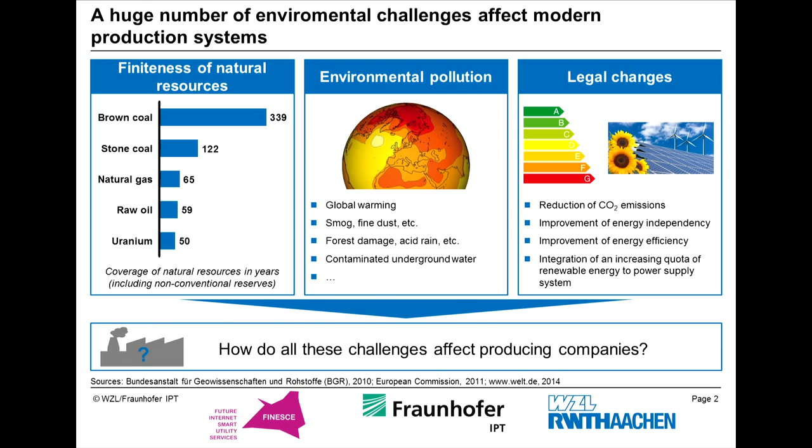But the basic motivation for that is always costs. So if you want to motivate companies to think about and consider a certain new topic, it's always about trying to internalize external costs, costs regarding the environment. This is basically the key aspect and motivation that we are looking at in our institute.

Talking about costs and some specific figures, you can see that today, in today's industry, the costs for energy are already a big factor. On the left side of the slide, I collected a few figures regarding the German industry in 2010. I took some figures from companies that have a high energy consumption.

Only in Germany, for these four sectors - chemical processing, paper industry, metal production, and the production of non-metallic mineral products - they already sum up to an amount of 5.8 billion euros for electricity.

Looking at a few more statistics, you see that prices for energy, and especially electricity rates on the right side, increased over the last decade, and the trend is still expected to rise further. This is a big factor that comes into the thinking of companies - the motivation via costs, so the reduction of costs.

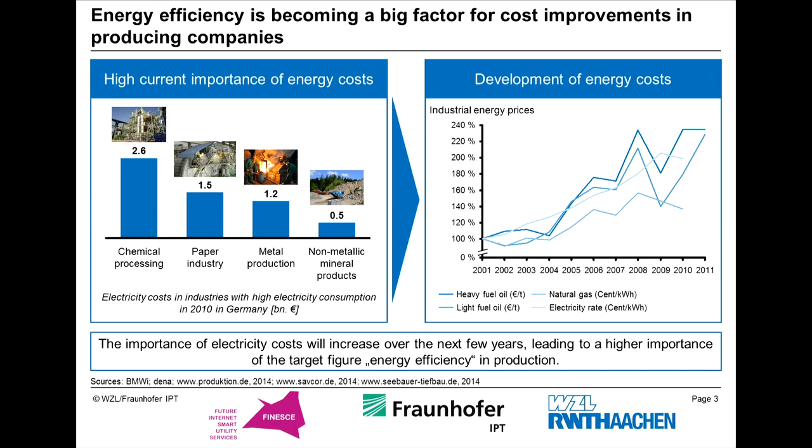Then looking at today's price models for companies - what are the basic electricity rates that companies have to cope with today? I collected an example of tariff rates used in Aachen from our local energy provider. But I think this applies to basically most companies, at least in Germany and Europe, that electricity rates are made up of three elements or categories.

On the one hand, as a basic cost rate, you have the user fee that a company has to pay. This comes from the maximum peak load that a company needs over a whole year. It might well be the case that in a special industry you only have one big peak in your electricity consumption, and this is the factor out of which this user fee is made up - one big peak destroys your cost balance in this cost category.

We also asked the local energy provider: can you make a guess in how many cases, or what percentage of the year in time, this maximum peak load is achieved by most of the companies?

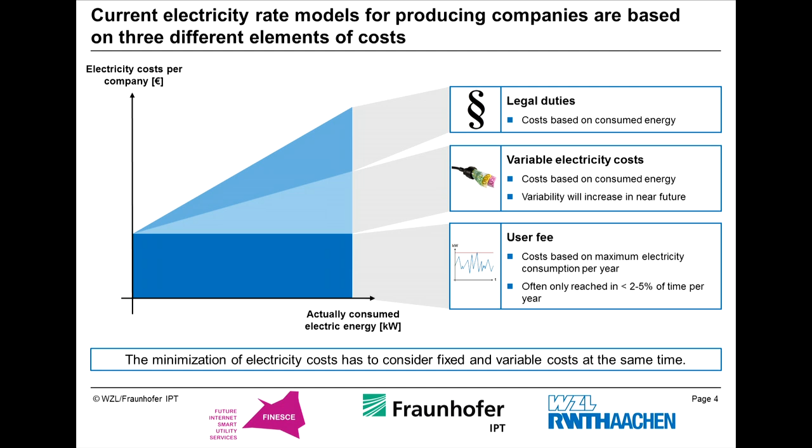The last cost factor is our legal duties, basically taxes that the company has to pay for its energy consumption. This is one cost factor that's not very influenceable by companies, but it's also one element that these costs are made up of.

So from a company perspective, talking about cost optimization and how costs can be minimized, we see two possibilities, which are also located here in the energy cost diagram. The first, which is quite famous and widely used in the industry, is minimization of costs by process optimization.

By looking at the processes in detail and the process parameters, companies try to reduce energy consumption, and also try to recycle or use scrap out of the production process and feed it back into the process. They try to minimize costs for all resources used in the production process.

The second possibility is what we're looking at in the project FINESCE, which is also the key assumption in our use case, which I'll introduce in a few minutes. This is what was also addressed in the previous talks: the possibility to reduce energy costs by reducing peak loads, trying to reduce your maximum energy consumption through intelligent production steering, by distributing the consumption of different machines, tools and resources in the factory intelligently to a quite steady or even level.

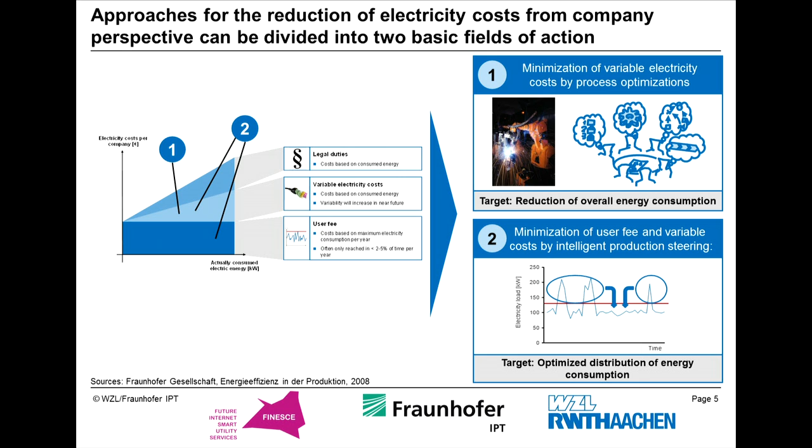So what is the basic enabler for this approach, and what is the basic solution approach we're using within FINESCE? In Germany it's quite famous under the term Industrie 4.0, or Industry 4.0, which is just another word, and Internet of Things is of course at least one part of it. The key term for us in the context of Industry 4.0 is smart factory.

In a smart factory, a small definition, there's a higher level of interaction between the different employees and also between the machines themselves and all the technical resources integrated into a factory. By using this approach and these new possibilities, we're able to look at more energy efficient production steering. The key aspect here is basically the horizontal and vertical data analysis.

Coming from the company perspective, we're basically in a sandwich between the layer above us and the layer below us. Looking below us, it's basically the machinery and technical resources level. When thinking about more intelligent production steering, it's necessary to measure the energy consumption of the different machines, and it's also necessary to enable the different machines to communicate with the production steering, with the production planning department, and with each other.

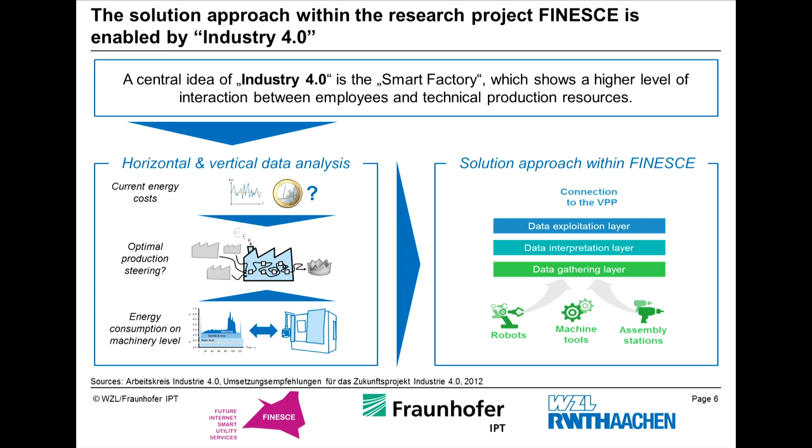So the demonstration factory is not just a concept or an institution developed just for FINESCE, but it's one institute that gives us the chance to test our use cases in a live environment. So what is it basically? It's a production of two different products planned there at the moment. It's basically the street scooter, and an e-kart.

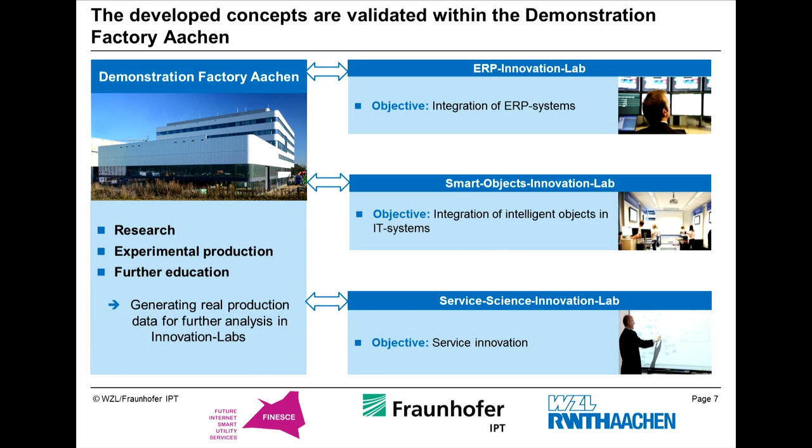Then the Smart Objects Innovation Lab, so how can intelligent objects also be integrated in the IT system? And the last one is basically the Service Science Innovation Lab, where the main focus is on service innovation. Within FINESCE, the Smart Objects Innovation Lab is more or less the field that we are addressing. So perhaps a closer look into the factory.

In this layout, basically these two products here are produced. So the MAXeKART, this is a kart with an electric motor, so a toy for adults, as we say in Aachen. It's not designed for children, but a product that will later be sold also for adults, for example, for going to the forest or off-road on the weekend.

And the other one is the street scooter, which is an electric vehicle developed in collaboration with Deutsche Post, the German mail company. These two products run on different ways through this production, which gives us the chance to look at the production steering and the differences between these two products a little bit closer.

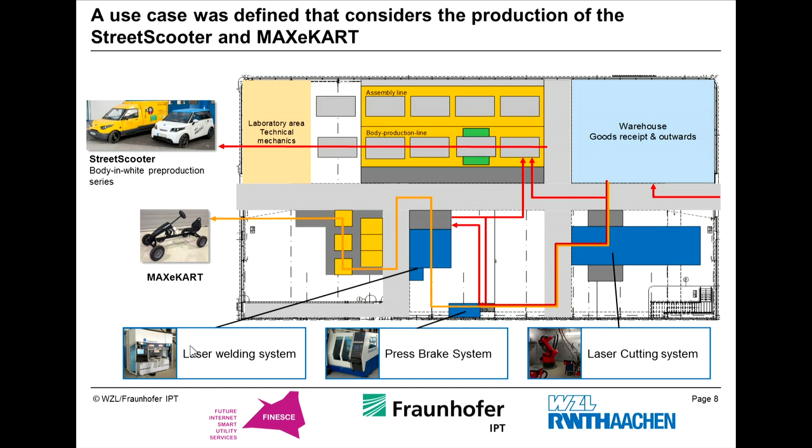So the relevant area is also marked here. The blue ones are the machines we are looking at in FINESCE, applying the intelligent production steering we are developing. The first is a laser cutting system, a small machine necessary for cutting tailor-made blanks into smaller ones. Then the press brake system, and the laser welding system as the third one. These are basically the machines we're trying to look at in FINESCE.

In FINESCE, we are trying to reduce these peaks to a quite steady load in the project by shifting capacities and production times between the different machines intelligently. The interesting point is that the logic behind that also puts new ideas into focus. For example, in a classical plant or factory, you're always planning for maximum output, but looking at higher energy costs, other ideas or production steering logics might be relevant.

So, for example, is output everything, or is cost the main factor, or how can we introduce energy efficiency into the basic cost model? This is basically what we're looking at in FINESCE.

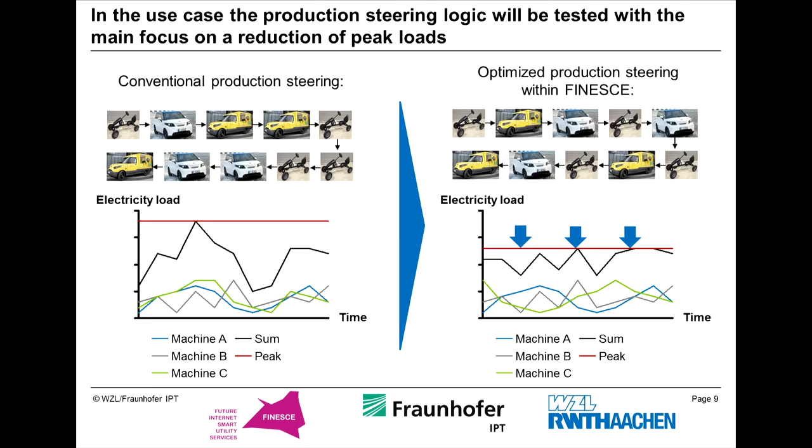As I'm running a bit out of time, just a few remarks on what are the next steps in the research project and what we are working on at the moment. We are basically in the phase of installation of the energy measuring instruments and the meters into the company.

We will also expand this use case virtually a bit, by simulating energy consumptions of machines that are not actually there at the moment, with some colleagues working on that. Then the data acquisition and evaluation will be a huge phase in the project, and we are also at the moment developing the production steering logic, followed by validation and technical implementation of interfaces and so on. So this is basically what we're looking at the moment, and thank you for your attention.